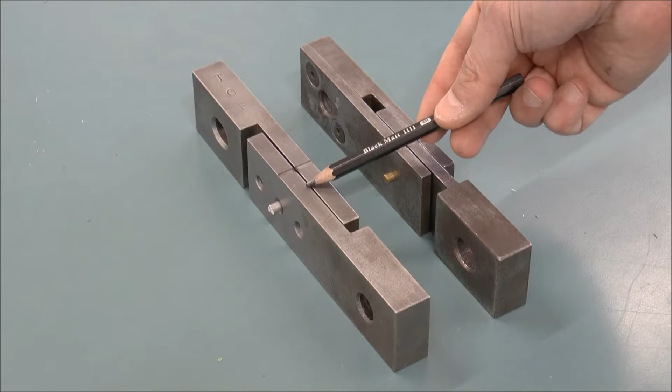This structure is called single shear connection. When the plates are loaded, shear stress is developed in the pin, and since only one surface resists against the loading, this connection is called single shear connection.

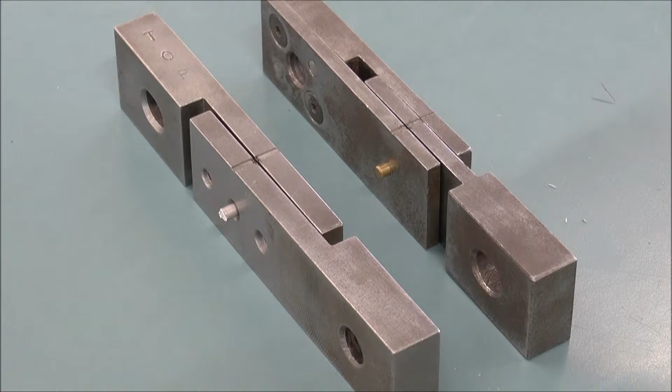This connection is called double shear connection. When plates are loaded, shear stress is generated in the pin, and as you see, two surfaces resist against the loading. That's why this connection is called double shear connection.

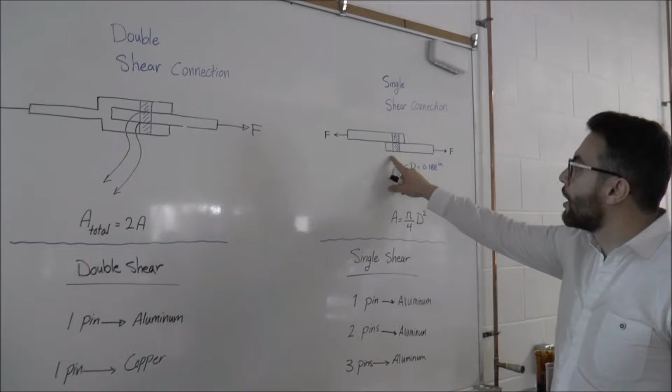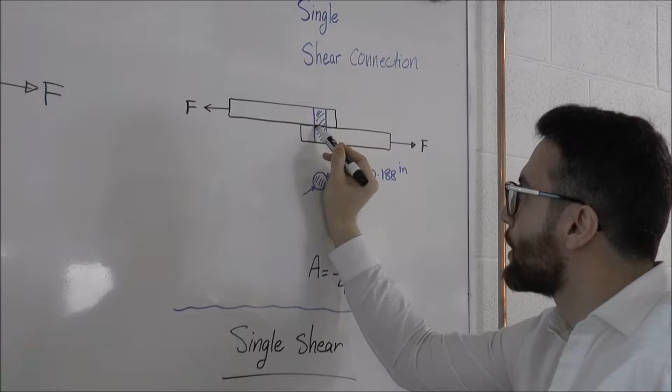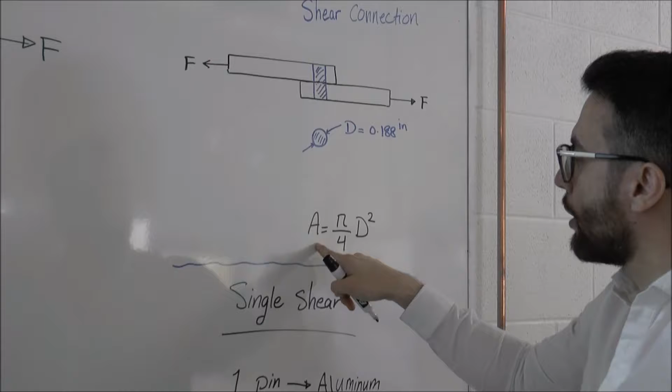This figure schematically shows single shear connections. Plates are connected by one pin, and as you see, only one surface resists against the loading. That's why the connection is called single shear connection. Pin is circular. That's why its cross section is calculated by pi over 4 diameter squared.

Today we will test single shear connections for one pin, two pins, and three pins, all made of aluminum.

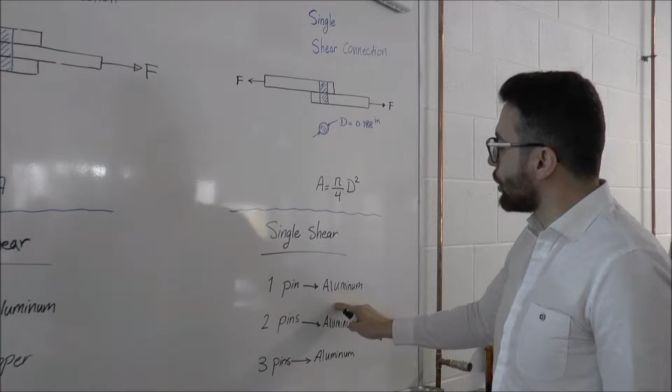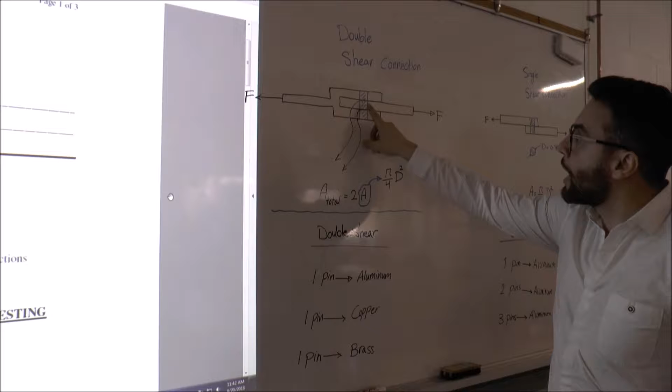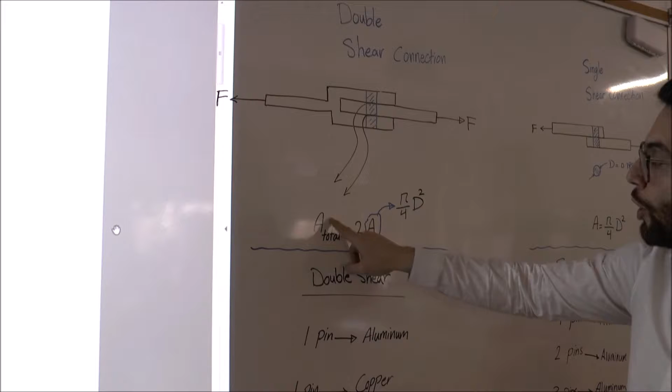This figure schematically shows double shear connection. Plates are connected by one pin, and as you see, two surfaces resist against the loading. That's why this connection is called double shear connection. And total shearing area is calculated by 2 multiplied by pi over 4 diameter squared.

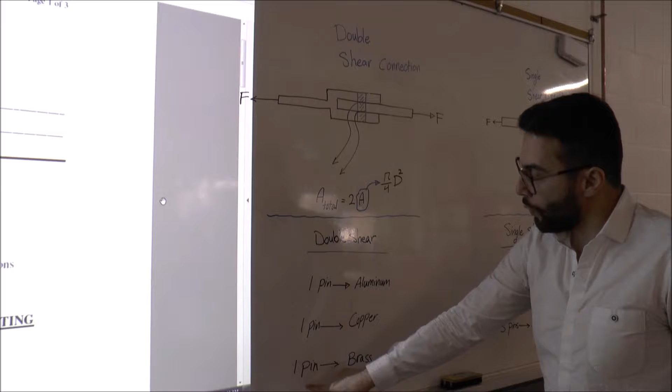For double shear connection, we will test it with one pin made of aluminum, again one pin made of copper, and at the end with one pin made of brass.

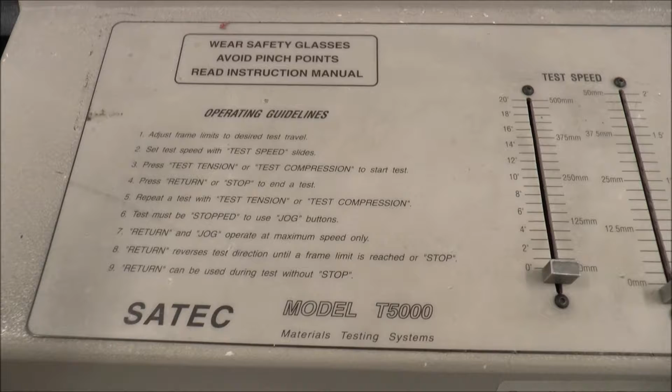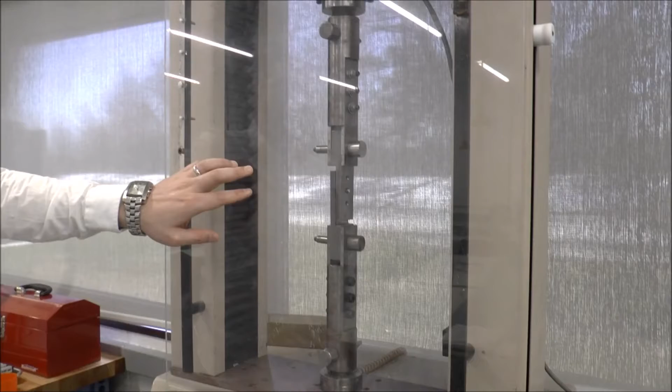We will use SATEC model T5000 for shear test. As you see, I have already mounted single shear connection plates. They are connected by one pin made of aluminum with diameter of 0.188 inch.

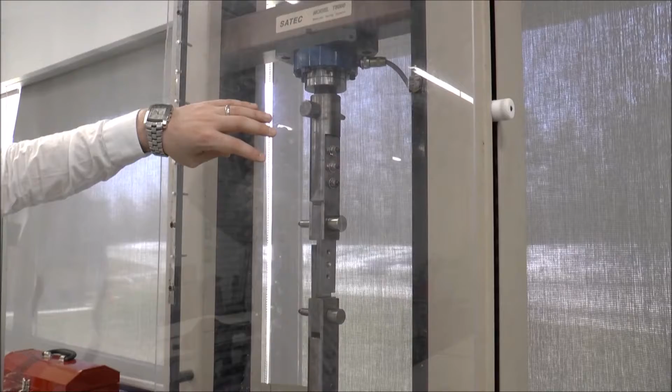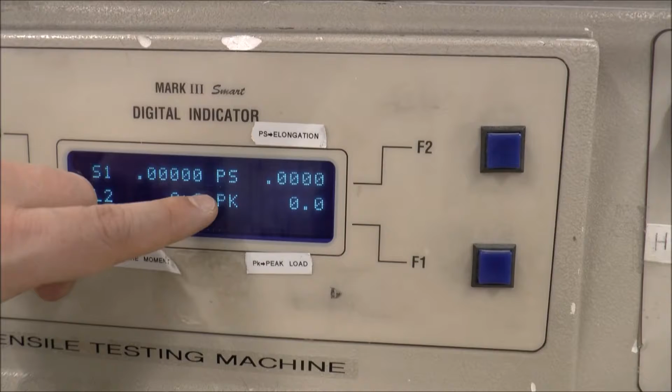When I run the machine, the lower crosshead will be fixed and the upper crosshead will move upward, and it would produce shear stress in the cross section of the pin. The load will increase until the specimen fractures, and at the end we will measure PK, peak load, in pound.

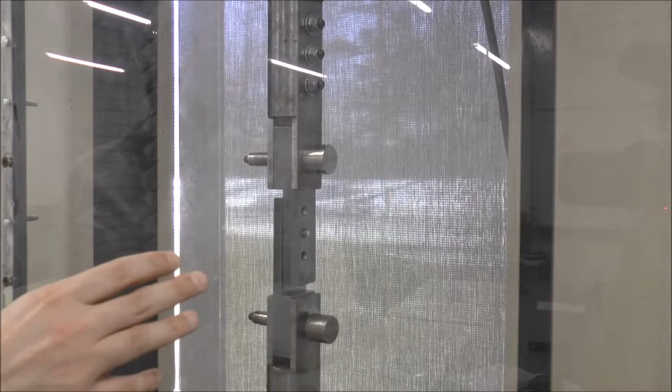As you see, single shear connection is already mounted. The plates are connected by one pin made of aluminum. The diameter is 0.188 inch. The lower crosshead is fixed, and the upper crosshead will move upward, and it will apply shear stress on the pin cross section.

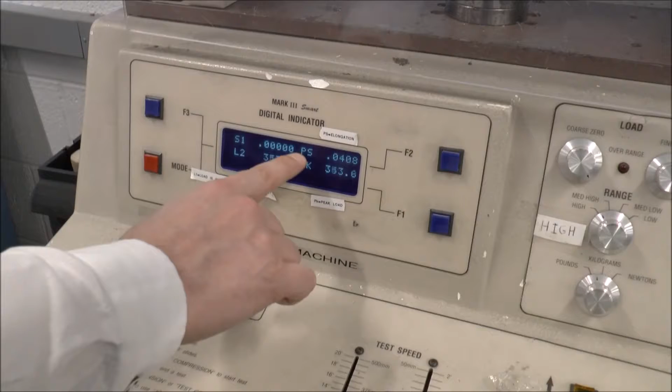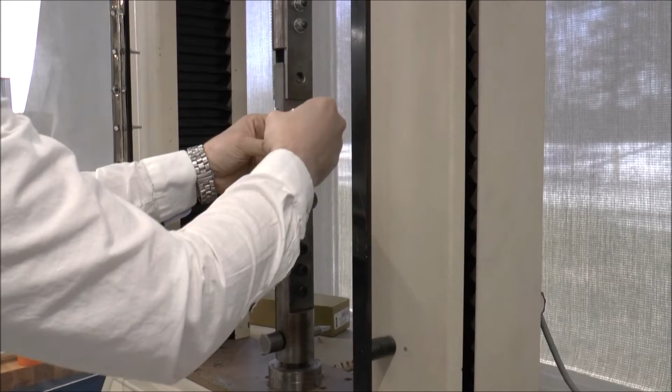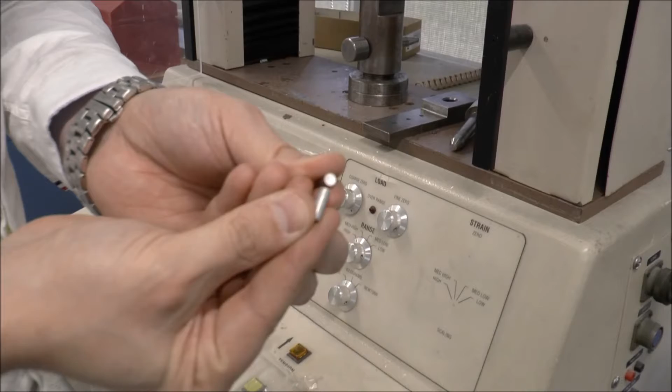Now you can see it. Now I'm raising test speed very slightly. L2 demonstrates the current load applied, PK demonstrates the peak load, and PS demonstrates the deformation. Look, specimen has fractured through one surface.